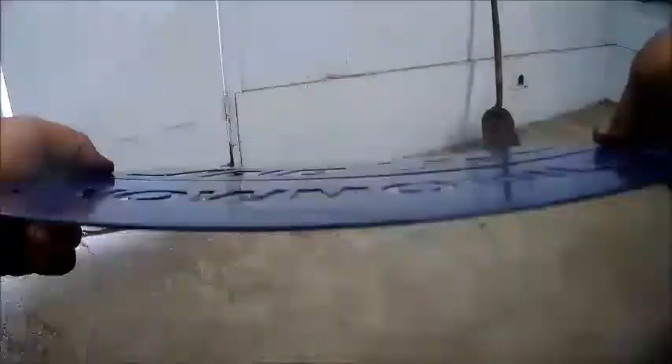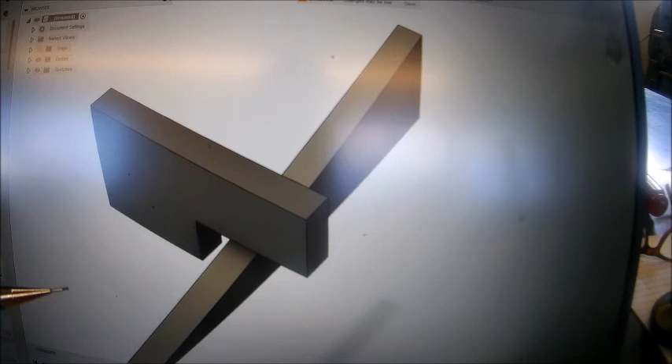Okay, we got a quick little project here we're going to make. These are basically a wedge and a block to line up sheets of steel that are not lined up when you're trying to weld them. And what you do is basically you weld this block to one piece. Your seam would be basically in this gap here.

So this piece would be welded to one piece, and then you drive the wedge in, and then it forces the other piece down equally or flush, and you can weld them up, or whatever you would call it when they're lined up. I guess you'd call it lined up.

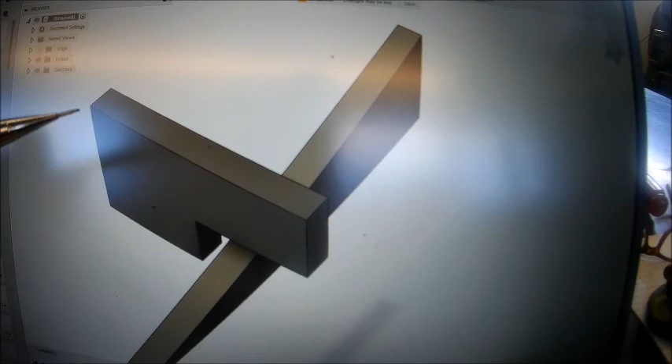So he was hitting around with these, so I'm going to make him a set. I'm going to make myself a set. It might be handy to have. And you just knock them off when you're done. Kind of a cool caveman thing that works pretty good. We stole it off a YouTube video we both watch.

Alright, here be the tool path for 4 sets of those wedge clamps. And the software is kind of smart enough. It thinks about how the pieces could possibly tip out, and that's why sometimes it routes it over the part in a certain way. The yellow lines are not cutting, just routing over the parts. The blue line is cutting.

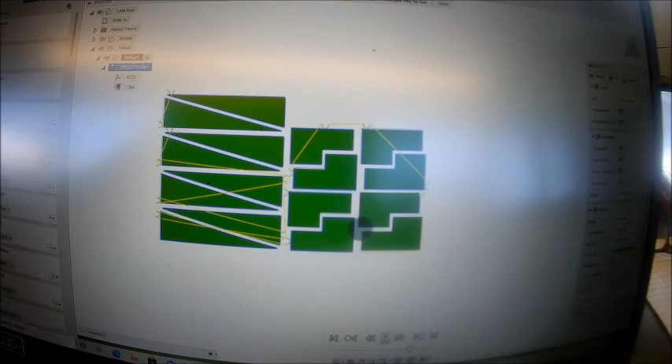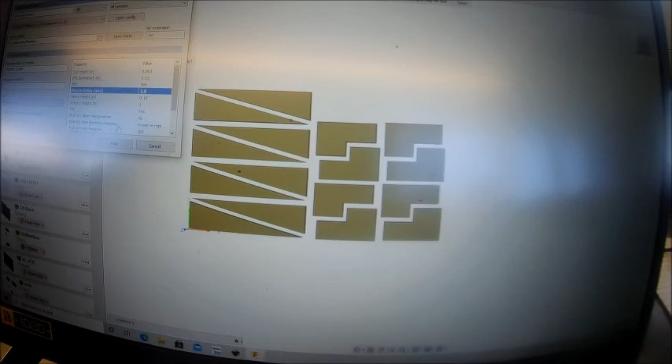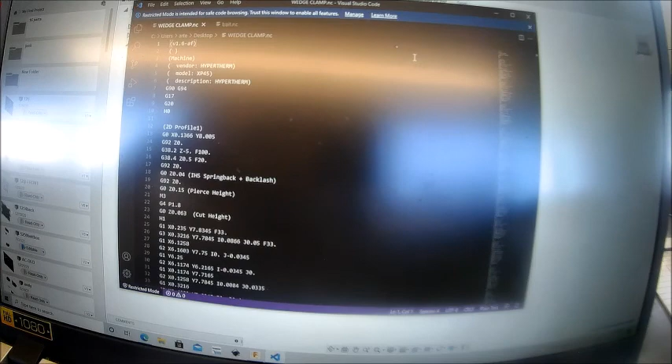So then we can make G-code. 1.5 seconds. That's probably, yeah, let's make it 1.8. We got all day. We don't want to not burn through the plate. Ouch. Post it. Wedge clamp, save as. I guess that's the G-code, if you know what that stuff looked like. Well, that's what it looks like, but you know how to read it.

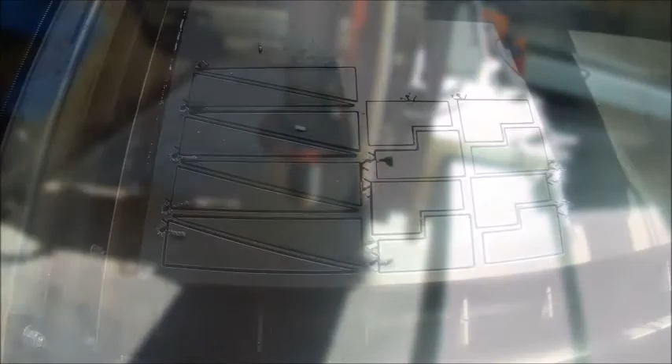Out here, but we got our wedge clamps cut out.

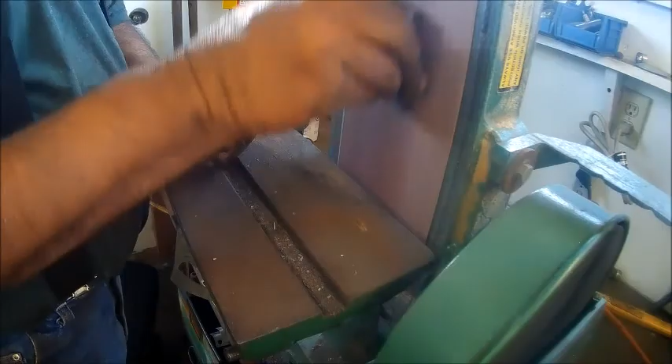Got 7 sets of these made. We're missing one bracket. Got one extra wedge, I don't know. Bracket probably stuck in the belt sander over there somewhere.

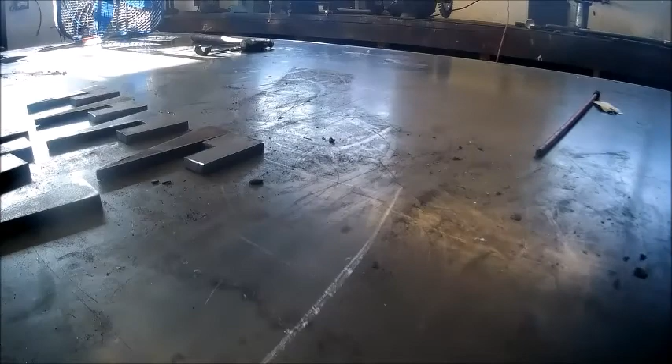So basically, how this would work, say this is your 2 pieces of plate. One's higher than the other. So you basically weld this to the one plate, and then you pound this wedge in there until this plate is pushed down until it's flush with the other plate. And then you pound the wedge out, weld this on one side, knock that off. Voila.